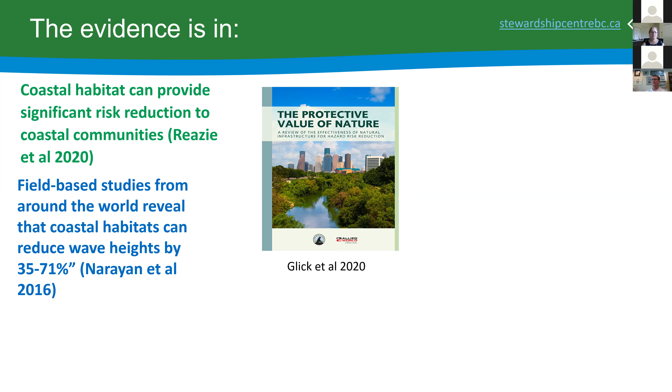71%, from 2016. Also, shorelines hardened with seawalls support 23% less biodiversity and 45% fewer organisms than natural shorelines. All this is evidence that suggests that both natural and nature-based approaches for hazard mitigation can be equally good, if not better than conventional approaches. And they often are less expensive to install.

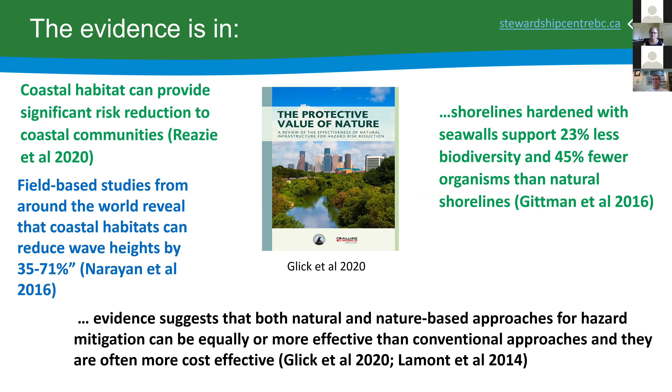So what is Green Shores? Well, Green Shores promotes project designs that dissipate wave energy, accommodate storm surge, and lessen flooding. It incentivizes habitat restoration and coastal ecology, maintenance or restoration of sediment transport processes, and the creation of natural areas. It offers a resilient approach to sea level rise and climate change adaptation.

So Green Shores is validated. It's an approach that has a solid track record of endorsement and recognition. We're the recipients of a major grant from Natural Resources Canada to support Green Shores implementation, one of 8 projects from across the country. Green Shores is the winner of Best Environmental Idea to Address Sea Level Rise in a competition at Simon Fraser University in 2014. And finally, we are a finalist with the Real Estate Foundation Lands Awards in 2010.

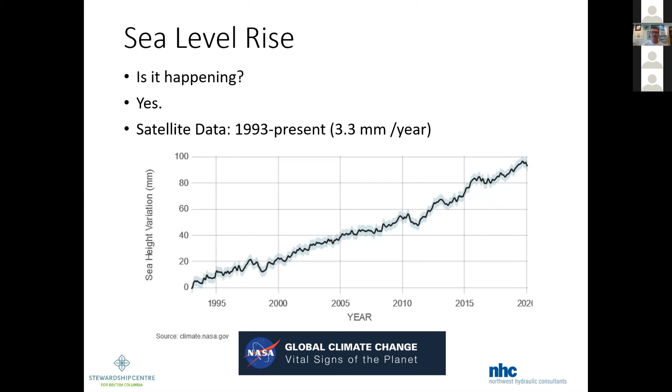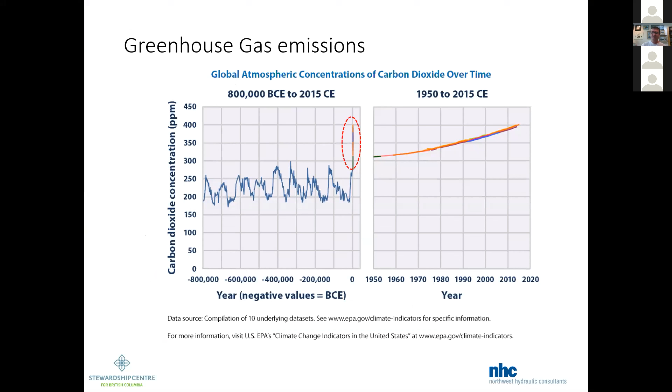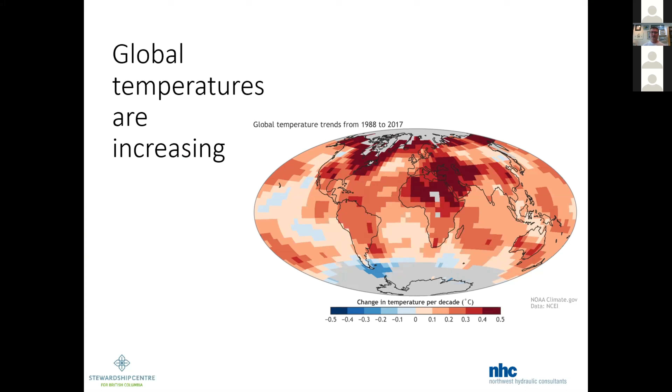So quickly, sea level rise, what it is. Yes, it's happening. You know, that question sometimes comes up. The global data is if you average out the entire global record, we're averaging about 3 millimeters a year, and have been since about, if you average back to 1993. What's driving it is really increases in greenhouse gas emissions. The parts per million of carbon dioxide concentration is now above 400 and continues to climb, which is leading to increasing temperatures. And the increased temperatures are reflecting themselves in two ways. One is thermal expansion of the ocean. Just as the water heats up, it expands a little bit, and that's accounting for some of the sea level rise. And then there's also ice melt. So, as a coastal engineer, I'm not a climate change scientist, but as an engineer, we have to stay abreast of what the science is telling us and incorporate that into our guidance.

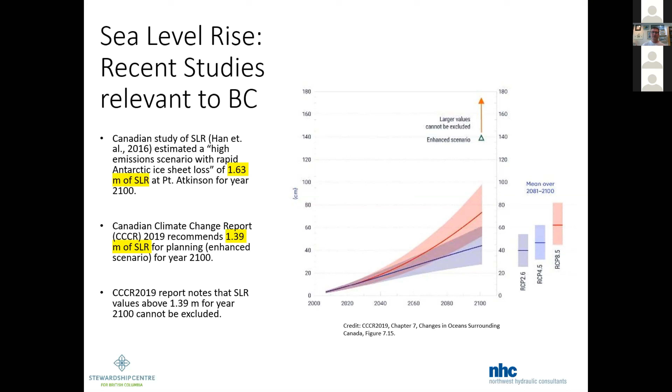Here in British Columbia, the provincial government has mandated that for planning and design guidance, municipalities consider 1 meter of sea level rise for year 2100. So that's generally what's being done. It simplifies things in one way. We just pick that 1 meter and go with it. But that's 1 meter of sea level rise. It varies around the coast because in some areas the land is rising and in some areas the land is falling. So that gets factored in.

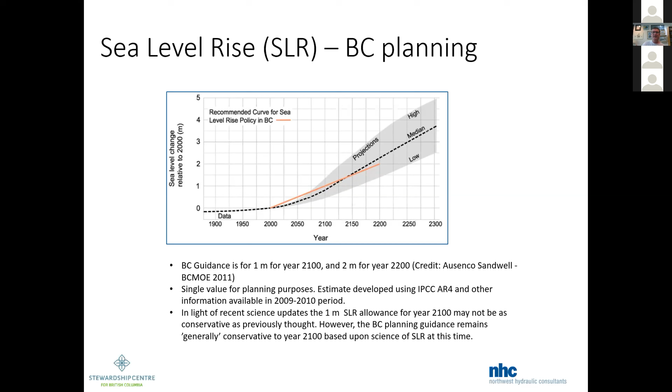There are guidelines for engineers and for dike design and everything in the province. I won't really touch on that, but just to say that there is some legislation around this and guidance for professional practice for engineers that we have to follow.

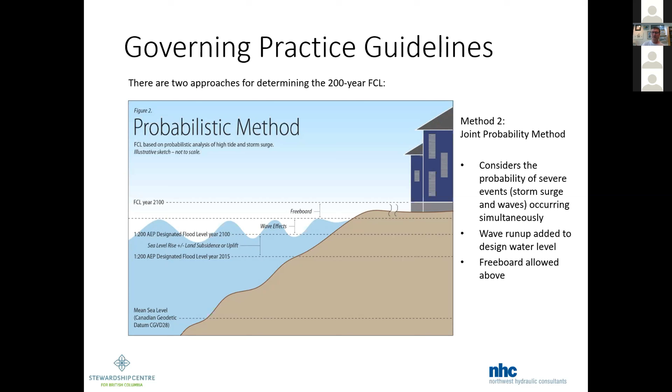The shoreline at Qualicum Beach is exposed to some pretty large waves in the Strait of Georgia, and so those get added on the wave runup. I'll talk about that a bit more. And then for a flood construction level, if you're developing a house, getting a building permit, the home should be above the FCL. And there's a freeboard which goes above that. So those are the components that go into shoreline design if you're an engineer.

So wave run-up is a term that coastal engineers use. It's the height that waves will run up on a slope, whether that's a gentle beach or whether that's a seawall. The picture on the right here is showing waves hitting seawalls in West Vancouver. That was a storm in December of 2018.

It's a neat picture, I think, though, because you can see the waves hitting the seawalls, the water's getting thrown vertically quite high, so the wave run-up is quite high. Where the photograph is taken, though, is more of a park setting, and there's more of a gentle beach and some vegetation, and the wave run-up is much lower.

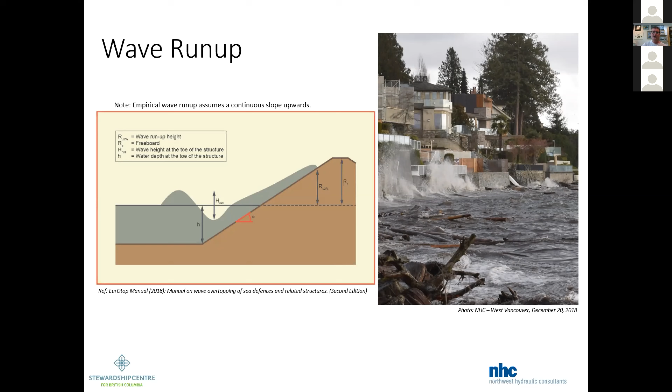Wave overtopping is another term that is used by coastal engineers, and it really talks about if your shoreline isn't very high, how much water is coming over the edge of the shoreline. It's a term used for dike design. If you've got a coastal dike, like in the Netherlands or in Richmond, here in BC, if the dike's too low and waves are coming over the top of it, the engineers start to become interested in what's the rate at which water is coming over the edge of it.

The picture on the bottom left is of Ostler Park in Campbell River. It's after a storm occurred, and you can see logs and debris. During the storm, the waves were completely coming over the top of the rock armor and starting to flood the park there. And the picture on the right shows the West Vancouver seawalk during a combination of a high tide and a winter storm.

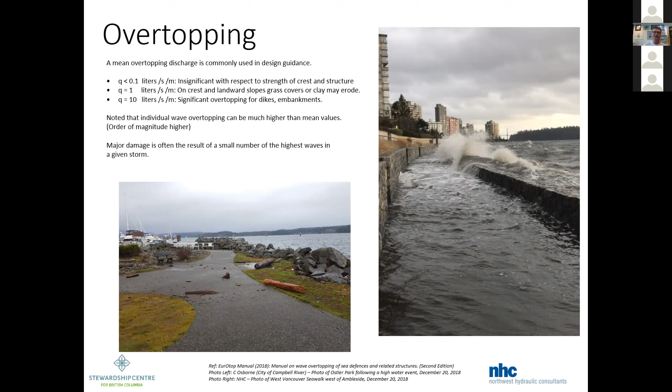So the effect of sea level rise on wave run-up and overtopping is such that a small amount of sea level rise can actually have a really big effect on the rate of overtopping. And just as an example, I included this. This was some work we did in Campbell River. On the top, that was with present day conditions for a design storm, similar to that picture you just saw.

And the average amount of overtopping for Ostler Park was about 14 liters per second per given meter of shoreline. So someone likes to say that's, what is it, about 16, 18 bottles of wine coming over every second on average. With 1 meter sea level rise, that jumps up to an average of about 130 liters per second.

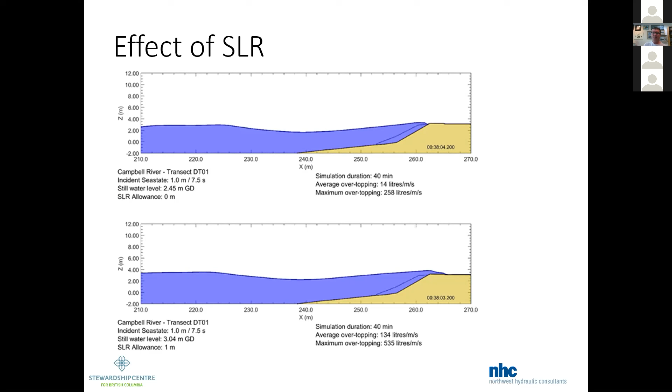And that change in average overtopping from 14 liters per second to 130 will completely change things. It'll flood Ostler Park, it'll cause significant damage. So it's beyond the threshold of what the present shoreline will be able to tolerate without experiencing a lot of damage and flooding. Whereas today it's sort of more nuisance flooding and relatively easy to clean up. So that was a very, very quick and brief background to some coastal engineering terms.

Shoreline protection can be considered on sort of two scales. One would be site-based, which you can think of as an individual property. And on another scale is more what we call reach-based. And by a reach, we mean a section of beach, a reach of the beach. It's a bit of an old nautical term.

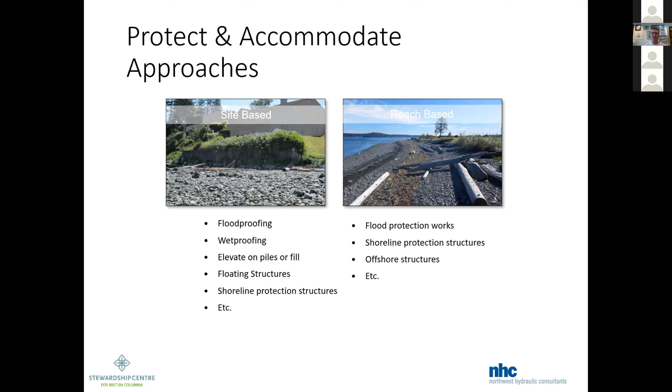And on a site-based approach, you can think about raising houses or flood-proofing, doing shoreline protection structures like seawalls or revetments. On a reach-based approach, you can start thinking about similar means of protection, but you can also start to incorporate larger offshore structures and other type considerations. I'll give some examples here.

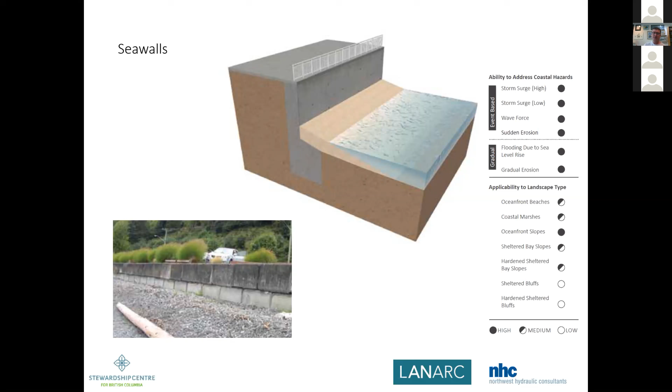Some of these graphics were developed jointly between NHC and LANARC. D.G. Blair mentioned David Reed. His team helped produce some of these great graphics. So a very classical form of shoreline protection are seawalls. They can be very effective, but one of the downsides against them is they will alter the shorelines in a significant way. We'll talk about that in a little bit.

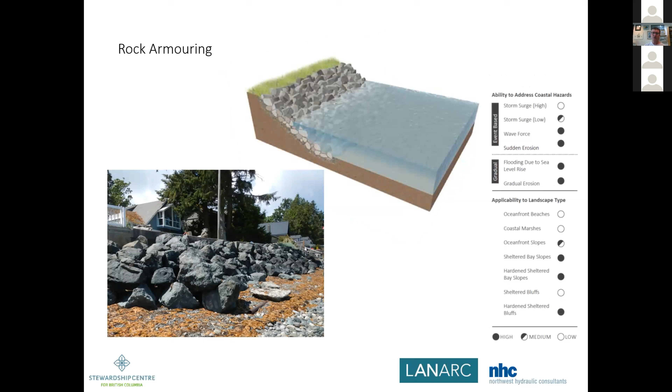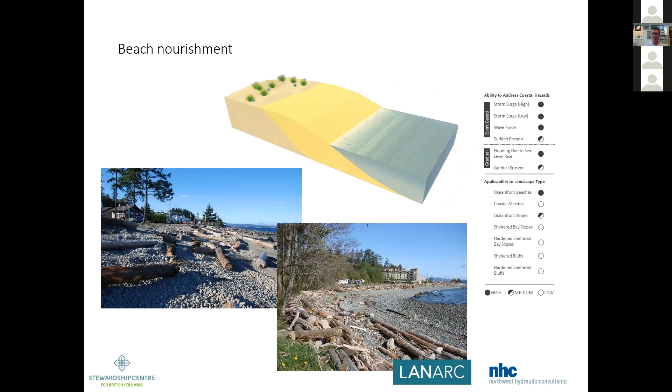Another means is rock armoring. I think it's pretty common. You see this a lot in Qualicum Beach, a revetment slope. Beach nourishments can be very effective, but the engineer has to be very careful about where you plant a beach nourishment. If you have a lot of longshore transport potential, putting a beach nourishment in, you'll spend a bunch of money to put sand down and then just see it washed away.

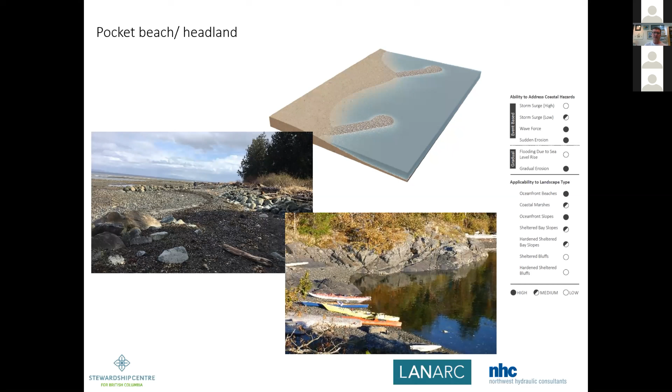Pocket beach headlands. This is an idea that kind of mimics what we see in nature. If you sea kayak, or just boat or walk up and down the BC shorelines, there's many examples around Vancouver Island and the Gulf Islands of little pocket beaches where you've got rocky outcrops on either side and then a nice sand and gravel beach in between them. Similar idea, you put some engineering rock armor structures out that break up the longshore transport and maintain those finer sediments.

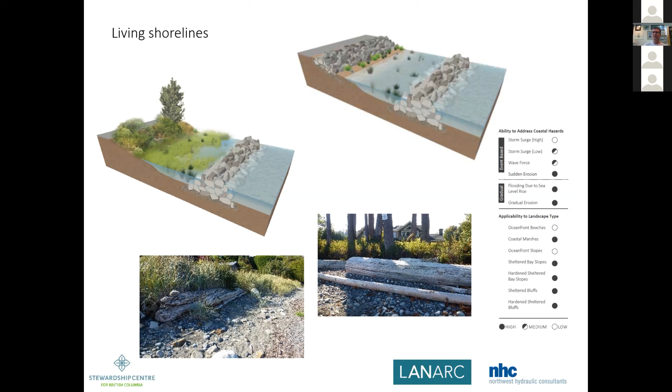Ideas exist around living shorelines where if the wave energy is too high, a structure is built some distance offshore, which helps to break up the wave energy and allow for various options. Two are shown in these graphics, but different options that you can consider. But the first thing you have to deal with is dissipating that heavy wave energy that's coming from offshore to then allow different shoreline habitats to start to be developed. So that was a very quick range of very high level ideas of what can be done within engineering practices and tools.

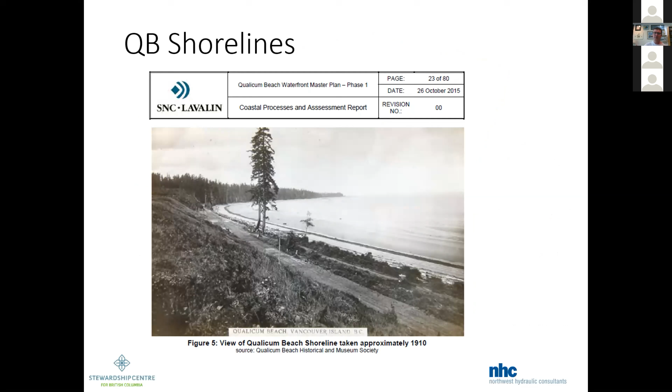Part of the master plan study that SNC-Lavalin did, they looked at the history of Qualicum Beach, and I find these old photos quite fascinating. You can see the very large trees that used to come down right to the shoreline, the wide natural beaches. Picture showing looking up towards the Little Qualicum River estuary, and you can see trees and a wide natural shoreline. And in a large way, the beach has not changed a lot. And something I find striking is that even as early as the 1930s, people wanted to build their homes or their summer cottages as close to the edge of the water as they could.

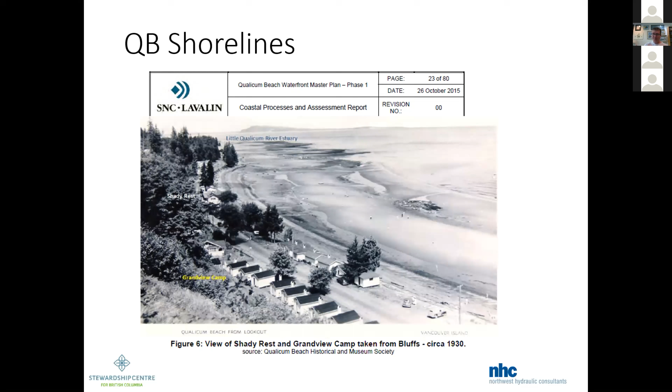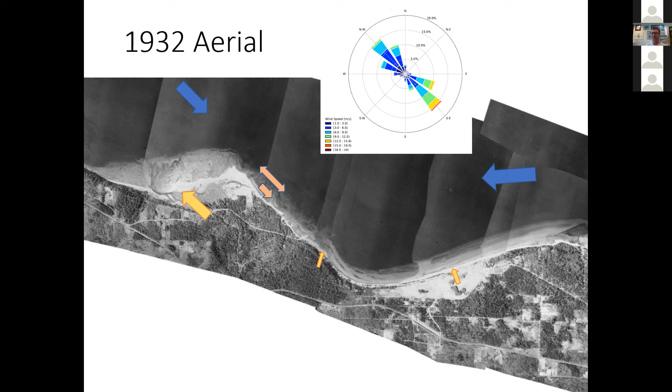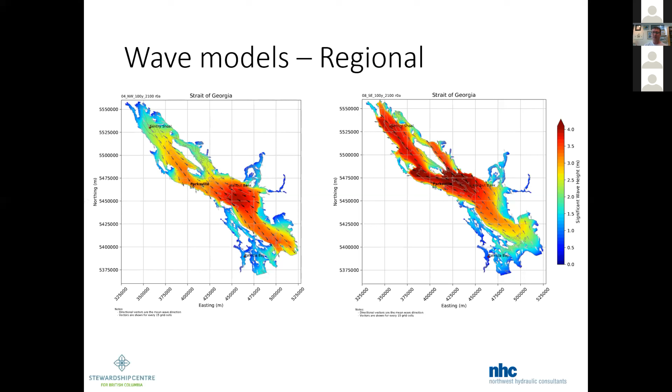There's two examples of regional wave models that we have at NHC where we hindcast historical storms and look at the spatial variability. It's notable that offshore in deeper water, you can see wave heights off the coast of Qualicum Beach that are 3 meters and greater. So those are very large waves that can happen in this area.

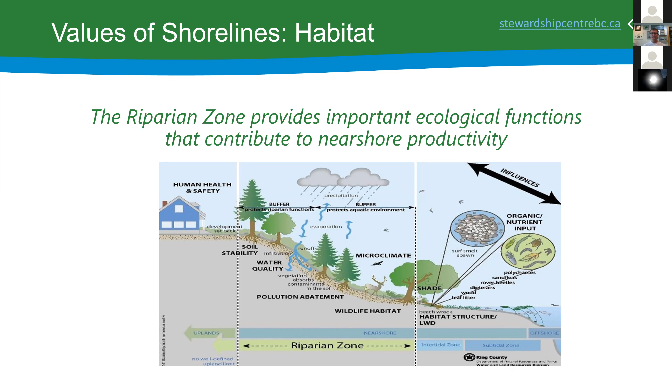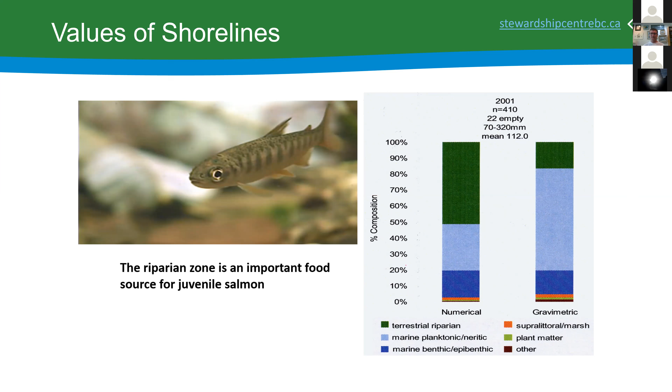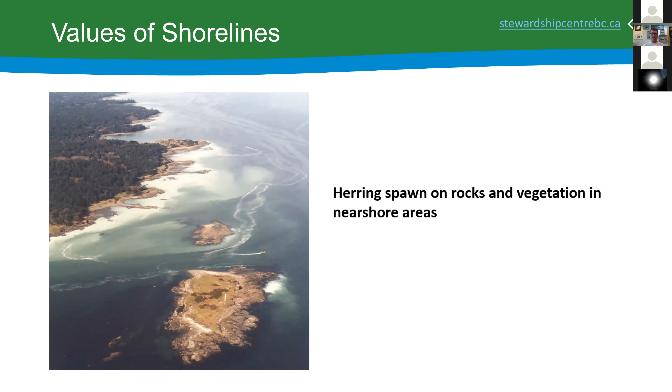We also know there's other types of organisms that use those shoreline areas, such as herring spawn, and I know that's a really important part of the BC coast, and we need a healthy shoreline for that. And of course, the forage fish. Having a healthy beach environment and keeping that sediment supply there for sand lance, for example, and other forage fish to spawn on is really vital. So it all adds up that functioning marine shorelines are really vital to our most iconic species.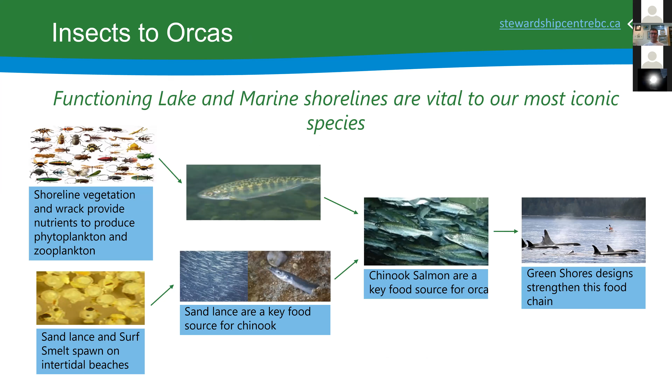And when we look at the flow, insects, woody debris, vegetation, they may not seem to be important in what we do right along the shore. However, there's a direct link up the food chain to our species, such as orcas, seals, sea lions, shorebirds, etc. So what we need to do is think about what we do on the shore and how that supports that food chain for those iconic species that we all love to see.

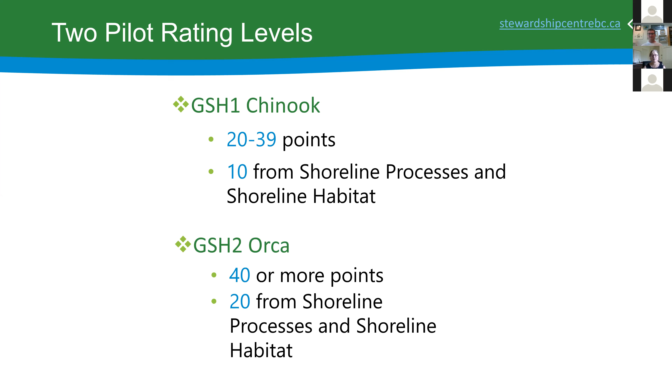That's really exciting. So how do we use the guidance material that has been developed? Basically, the ideal is to enroll and initiate a Green Shores for Homes project. And you want to do that before the project is designed. So that way you can utilize the design guidance to tweak your design to maximize the number of credits. So once you've enrolled your project, we send you the guide and then a template to record all the documentation

that's required. So in stage 2, as I mentioned, you're going to tweak your project design to maximize credits. You're going to construct your project and you're going to take photographs as you go and collect all that documentation. And when the project is finished, then you submit that information to a verifier, which the Stewardship Centre assigns.

And then the final stage is where the verifier reviews the project documentation, provides a rating, and then if the project meets the standard, then the project proponent receives the Green Shores award.